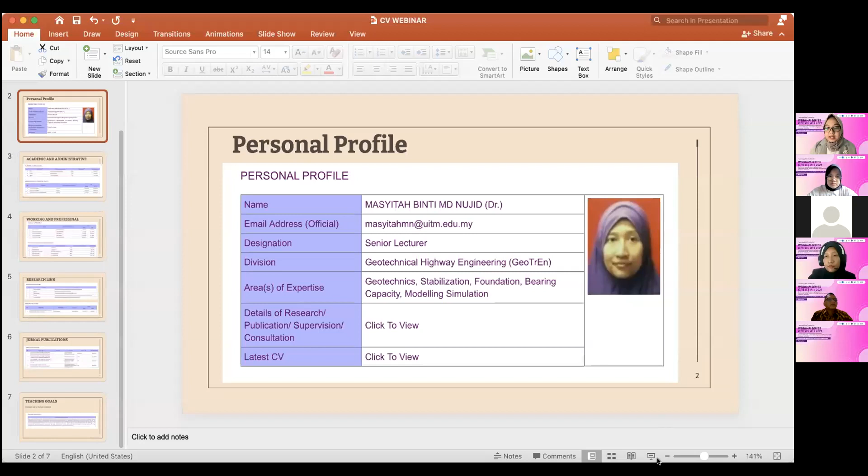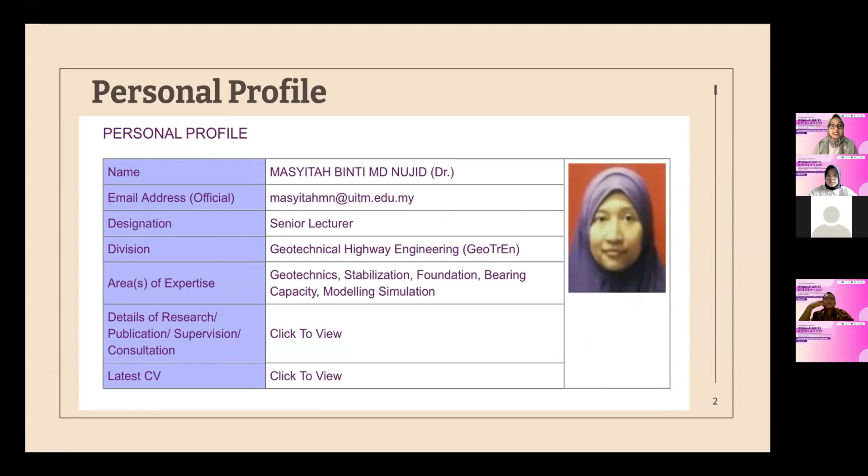Okay, I'll give a short resume about our presenter today. Our presenter is Dr. Masyitah Md Nujid. She is a senior lecturer in the School of Civil Engineering from Universiti Teknologi Mara, or UiTM, Cawangan Pulau Pinang. She graduated with a Bachelor of Civil Engineering from Universiti Teknologi Malaysia in 2005, and obtained a Master's degree in Geotechnical Engineering from Universiti Teknologi Malaysia in 2007.

She now teaches soil mechanics and geotechnical engineering courses, as well as conducts research in the same field. She has published about 24 research articles in the area, in peer-reviewed journals. Her research interests include soil mechanics, computer modeling and simulation, constitutive soil models, and soil stabilization.

You can see in my presentation about her interests in geotechnical engineering. Due to her expertise and experience, she has been appointed as an external examiner, a competition judge, a reviewer for journals and conference proceedings, and a member of an international conference committee from a local organization. Now, please welcome our speaker today, Dr. Masyitah Md Nujid. The time is yours, Doctor.

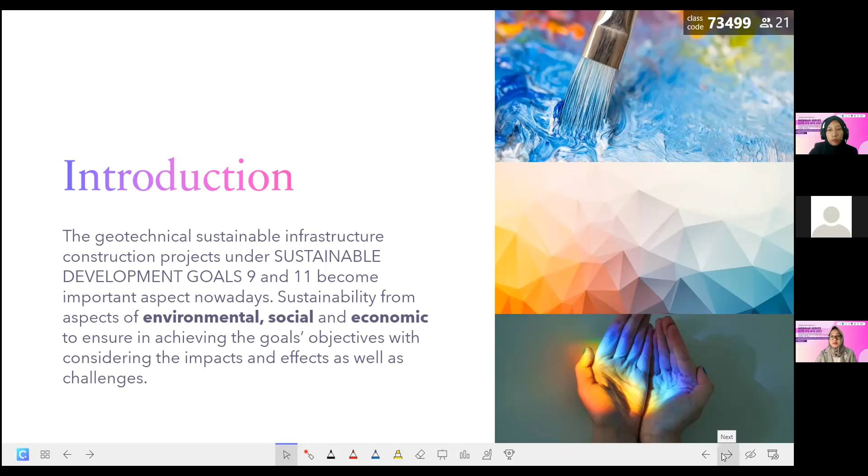So this is the goals that we aim from these activities. Okay, now I go to topic 1. This is about overview of geotechnical engineering.

Dalam geotechnical engineering, kita tak boleh avoid yang ia melibatkan beberapa branches dalam civil engineering itu sendiri. Contohnya bila kita nak buat satu dam, empangan air, kita tengok characteristic properties untuk building tu adalah concrete, kemudian water, and then don't forget about the geotechnical aspect, because this is the foundation base. Kalau you construct any structure without a strong base, struktur tu akan mengalami collapse, akan mengalami failure.

Current practice sekarang, sebab kita dah limited open area, tanah terhad. Jadi option yang kita ada, contohnya kita buat tunneling. Tunneling adalah kaedah di mana kita tak perlu cut slope, tak perlu tukar natural slope jadi cut slope. Jadi kat situ kita dah sustain environmental impact kerana kita guna alternative.

We have to think out apa lagi option yang ada. Contohnya sekarang transportation boleh berada atas jalan, boleh guna light mass rapid transit, contohnya kita ada LRT, kita ada MRT. So these are the options di mana transportation ni ada kaitan juga dengan geotechnical engineering, kerana geotechnical engineering ni kalau nak faham asasnya adalah foundation kepada mana-mana struktur, mana-mana application dalam civil engineering yang you akan bina atau guna.

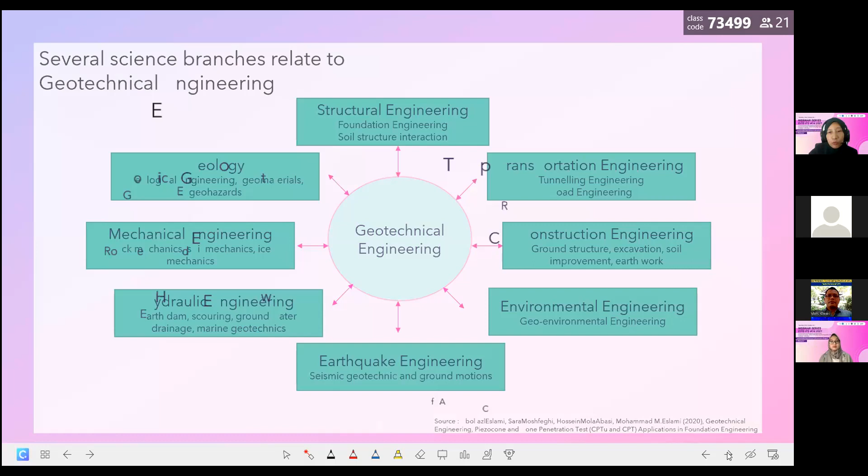So these are the things that we have to look at closely bila you memilih satu area yang you minat untuk belajar dalam geotechnical engineering for example.

Okay, apa peranan anda sebagai geotechnical engineer? Ini yang kita nak tengok. Tadi kita dah tengok branches dia. Antara peranan dia, sebelum kita nak pergi ke peranan, kita kena tengok apa dia punya applications, cabang-cabang yang kita boleh work in that.

Contohnya, as I said earlier, kita ada natural slope, kita ada terrain slope, tapi bila ada water effect, dia menyebabkan instability. So, as a geotechnical engineer, what are the things that you need to think out, or whatever design that you need to propose to ensure the stability of the natural slope, for example, ataupun cut slope. Kalau daripada natural slope tu, you turn to cut slope, what will be the best angle for the cut slope to sustain daripada failure?

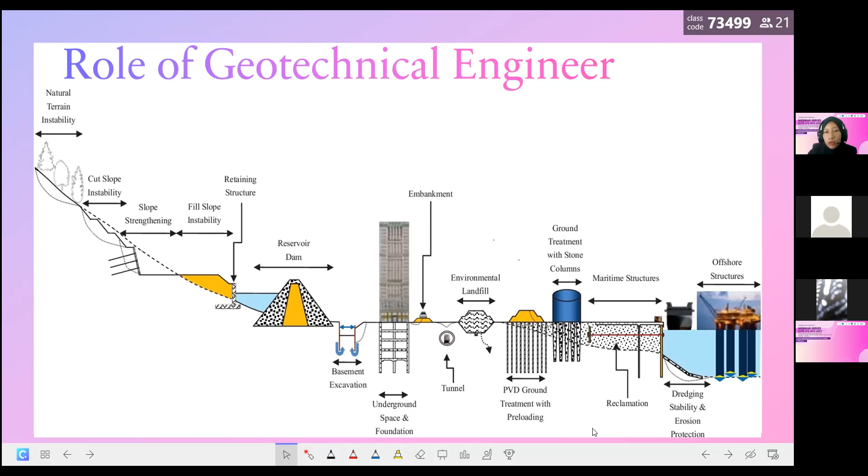Okay, on the role of the geotechnical engineer, as you can see here, there are four important roles. The first is analyze and design. As I said, as a geotechnical engineer, we are not dealing only with construction. Okay, I think I need to stop for a while.

Okay, sorry again, back to our discussion. As a geotechnical engineer, you need to know how to analyze and how to design. Let's say you are choosing a design from foundations—you have a problem site and want to decide whether to use deep foundations or shallow foundations. So as an engineer, first you need to know the soil properties, then use the soil properties at the design stage. Do the analysis, look between shallow and deep foundations, which design gives you the best solution suited to your problem site area.

Somehow, when we look closely at all aspects—sustainability, economy, and project duration—we couldn't simply choose any option due to these reasons. As I said, if we have budget constraints and want to do deep piling, but when we check the cost of a single pile, for example if we choose steel pile and a cheaper pile, it might save project cost. But when it involves a problematic area with high water content, whether you like it or not, you have to use piles.

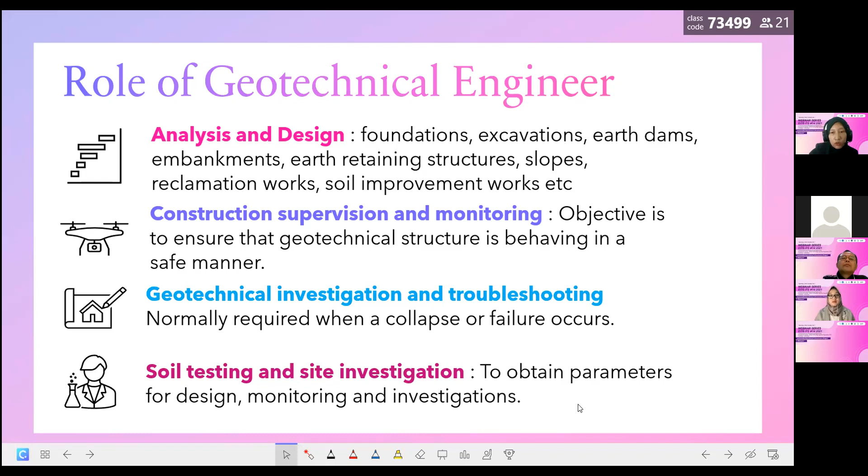So soil testing and site investigation ni is important to obtain parameters for design, monitoring and also investigations.

Okay, these are the applications in geotechnical engineering. For example, you are dealing with a deep foundation, somehow it's a mat foundation, raft foundations, and this cannot be avoided having the deep excavation and underground. So look at the retaining wall itself. They're not using the simplest retaining wall.

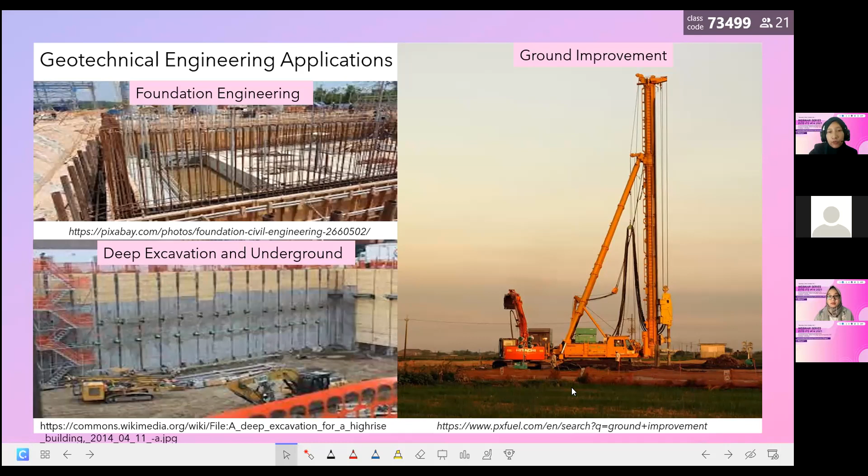Just mention the major group only.

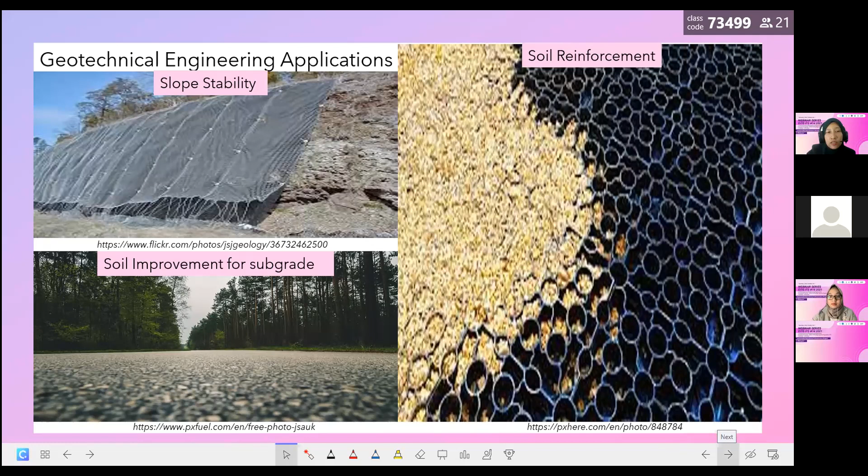Okay, the next one on the part of applications between soil improvement and reinforcement, I try to make a difference from the meaning itself. For example, soil improvement is an alternative considered when the natural soil does not meet the engineering requirements for a project. This is when we need to do improvement.

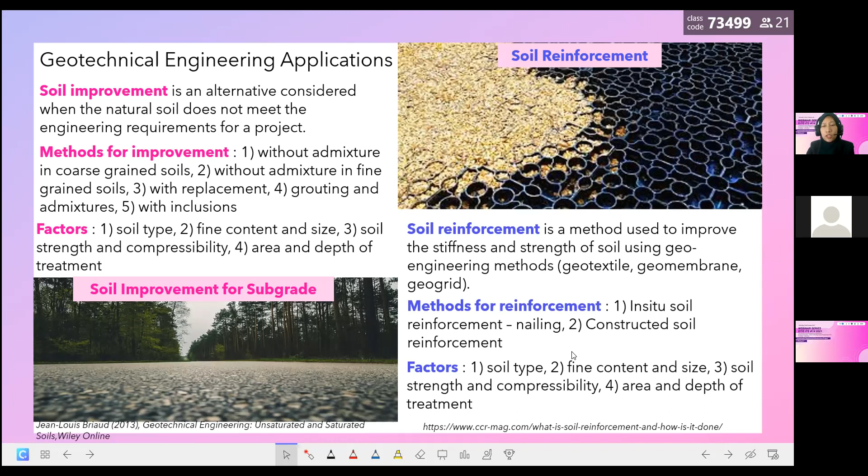Okay, and then the next one is part of the technique. In this technique we have drainage method, vibration methods, grouting and injection, chemical stabilization, soil reinforcement, and ground improvement. We also have heating, preloading soil, vacuum consolidation, ground freezing technique, soil nailing technique, and etc.

For chemical stabilization, due to our concern to avoid or prevent air pollution or environmental effects, you can see the research trend is using natural waste as a stabilization admixture or stabilization material. So now we try to avoid using lime, because when you look closely, lime can produce high carbon dioxide emissions, which is not good for our environment.

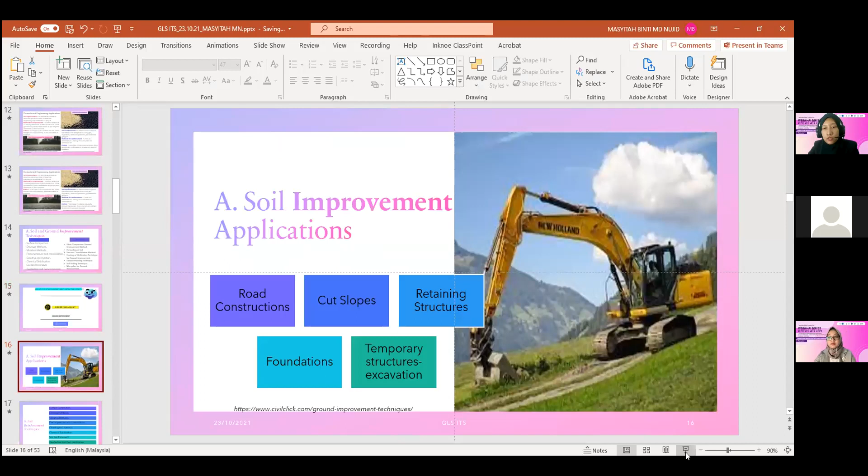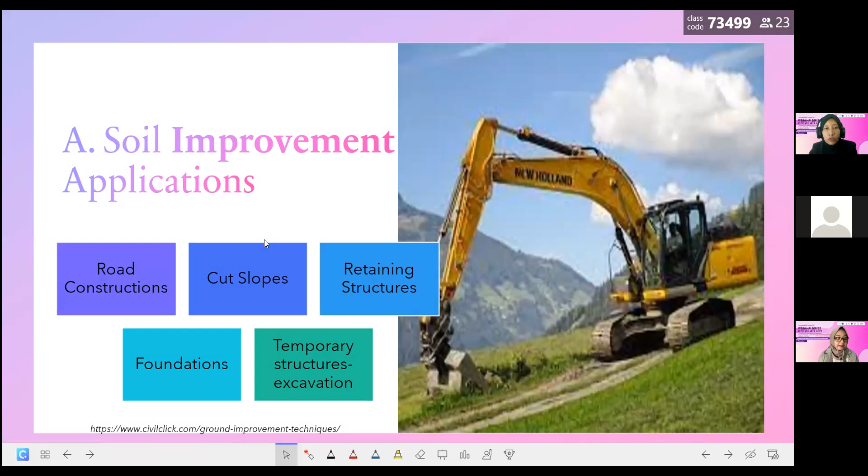Sorry, okay, the next one will be, hold on a second, the next one will be on this part, the applications. So as I said again, when you go to improvement application or reinforcement, it can be in the branches of geotechnical engineering, for example road construction, cut slope, retaining structures, foundations, temporary structure, and excavations.

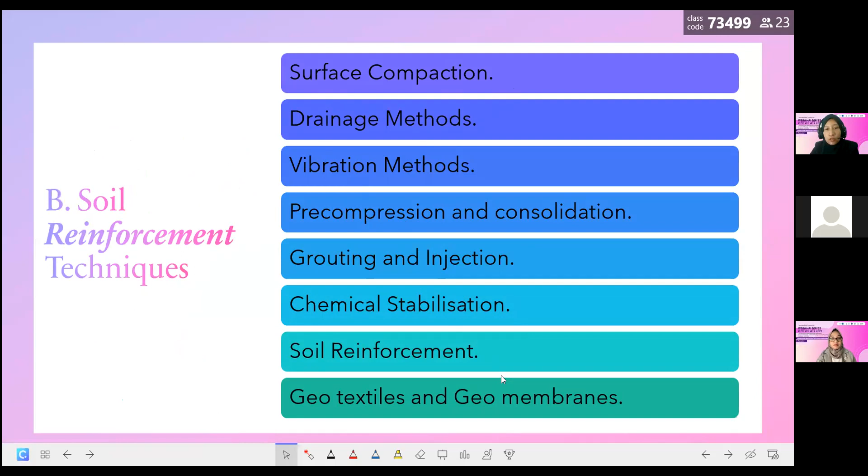The same thing is for reinforcement techniques, in the earlier slide we had a few methods such as surface compaction, drainage method, vibration method, precompression and consolidation, grouting and injection, chemical stabilization, soil reinforcement, geotextile, and geomembranes.

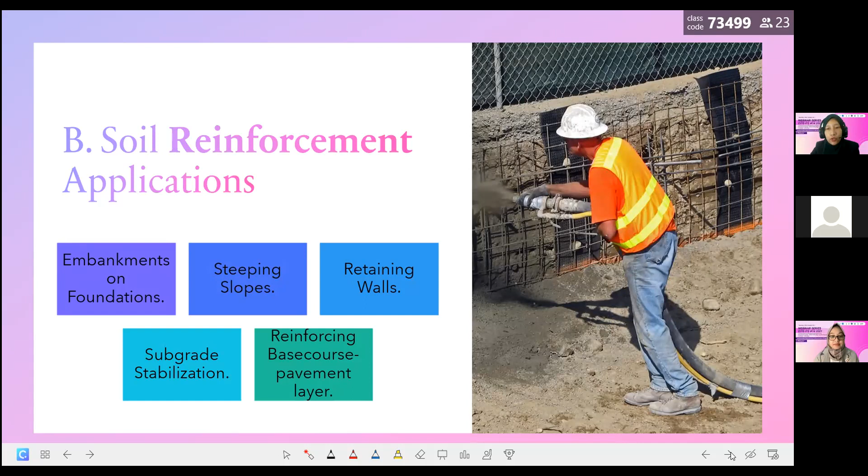Okay, again the same applications as before, improvement, but there are some soil profile conditions where we need to use two methods, both improvement and reinforcement. For example, if it involves very high water content or problematic soil. Other than that, deep excavation and underground works are common practice in Malaysia.

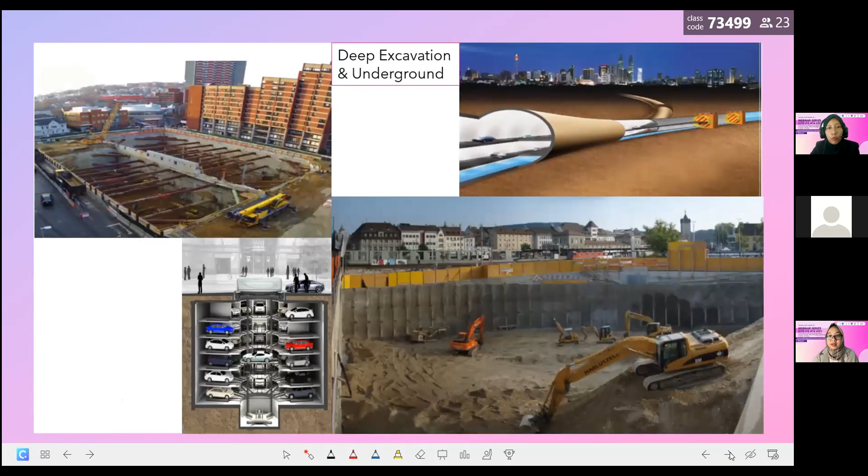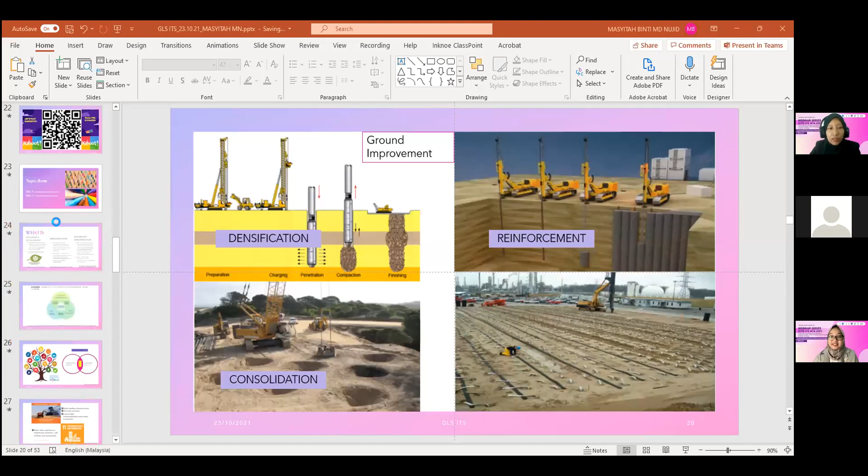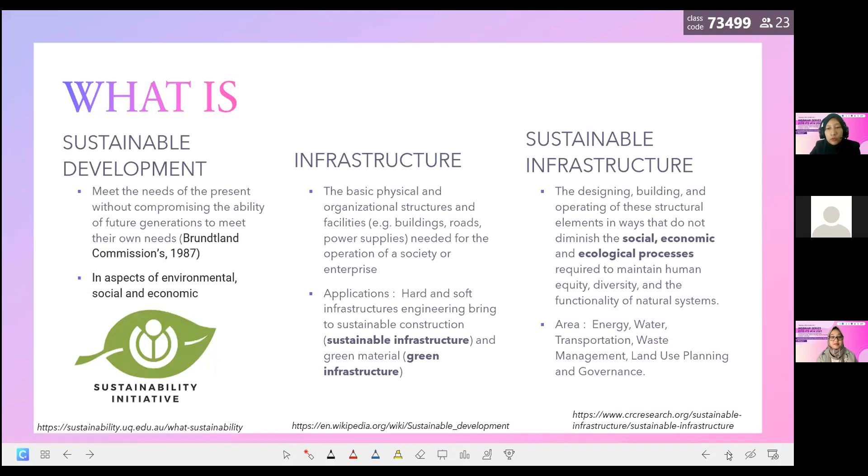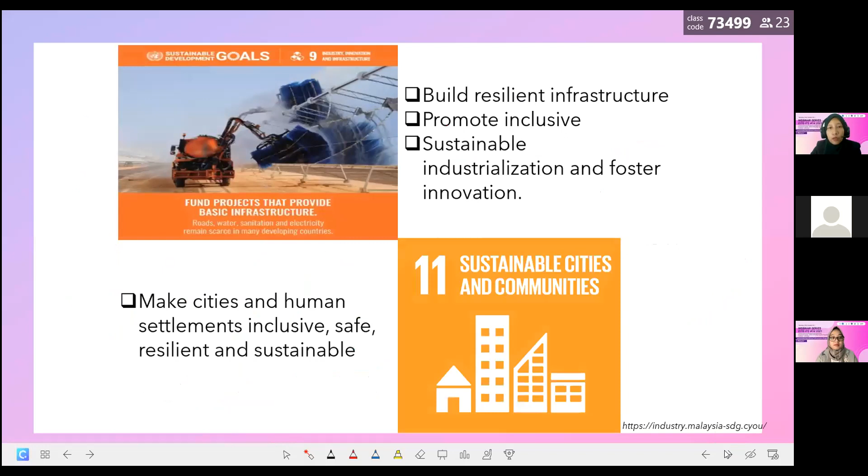Okay, the thing is that when you come out with case studies in Malaysia, they try to produce applications projects that really reduce carbon dioxide, and also in comparison when you look at SDG 9 and SDG 11, they are interrelated. It's the same as what I explained earlier, we look at three aspects from environment, economical, and also social impacts.

So the main focus of the talk here is on infrastructure projects, as I said it involves design, operation, construction, and also practice. The purpose of making this sustainable, from sustainable infrastructure or green infrastructure, is that we want to try to minimize all the impacts from social, environment, and also economic aspects.

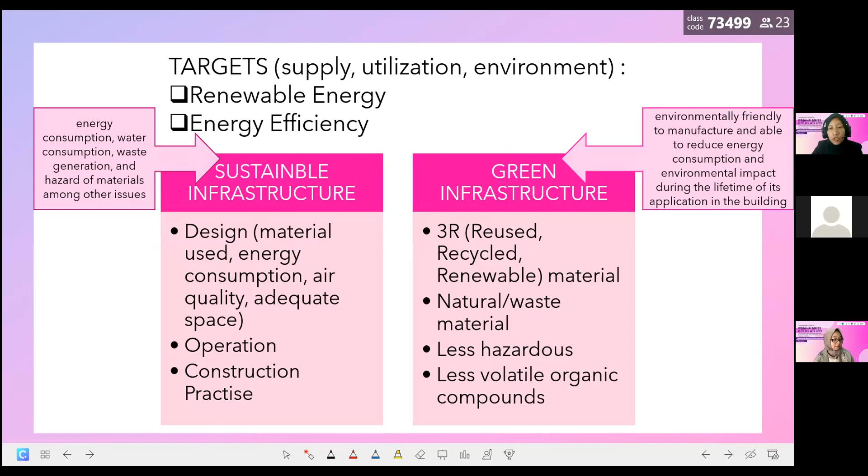Contohnya kalau green infrastructure tu we can use waste material and then kita kena fikir on part of the less hazardous, less volatile organic compounds. But the most important when dealing with these kinds of projects, we have to look at the factors. Apa faktor-faktor yang kita perlu lihat untuk pastikan construction kita tu sustainable? For example, alignment, material and resource, stormwater management, energy, environment control, construction activities. Lastly is the innovation design.

So the next slide, you can see how all these cases that I show you, macam mana they make decisions in order to sustain from any environmental, social or economic aspect impact. Dia melihat kepada teknik dan juga options.

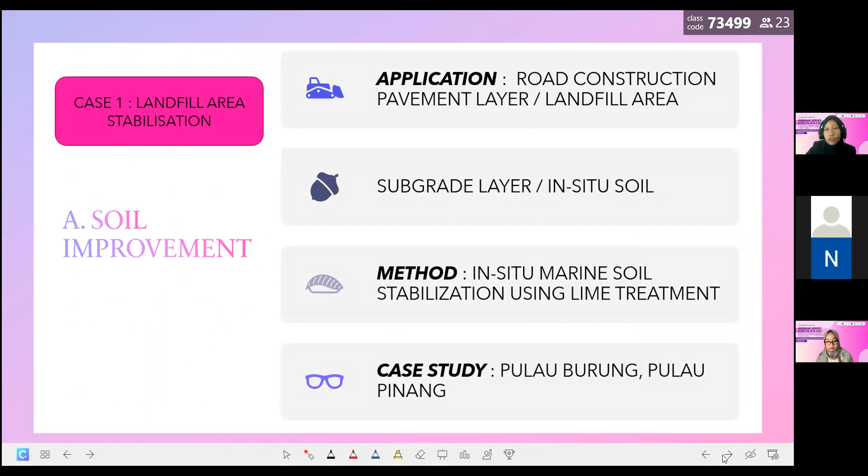Ada satu case yang mana saya tunjukkan di sini macam mana dia berurusan dengan landfill area yang very problematic, high water content. Daripada soil type tu kita dah nampak dia punya color tu grey dan high water content. Then you go to the soil properties, silty clay around 86% and sand only 14%.

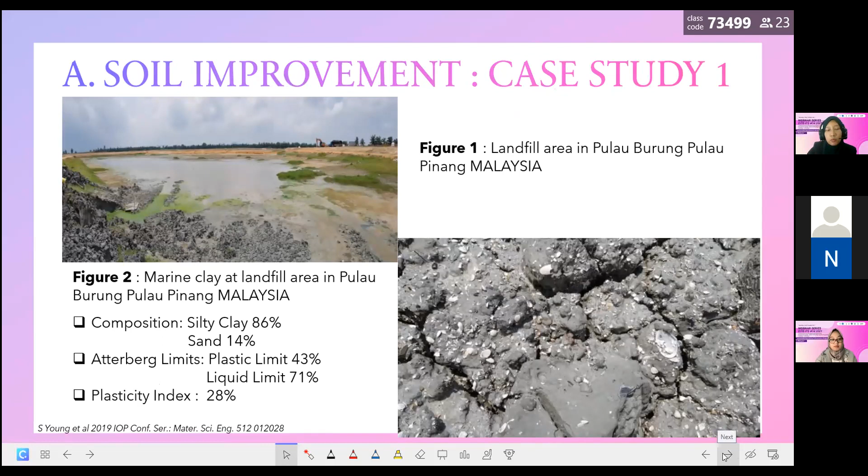So which is the best method technique yang saya bagi tahu awal-awal tadi sesuai untuk improvement. Dalam part ni sebelum dia nak pilih teknik mana yang sesuai, they go to the design and options dia. Dalam kes ni dia ada three options.

Option pertama dia akan construct dengan stabilize 300 mm untuk achieve CBR 30, ataupun option kedua dia buat remove and replace 300 mm, ataupun option ketiga dia remove and replace 1 m CBR5 material.

So in order to choose the best method for improvement or reinforcement, you look at design aspect, operations dan juga construction. In this first case, saya menunjukkan macam mana daripada design aspect ni dia buat satu keputusan untuk sustainkan dia punya project tu.

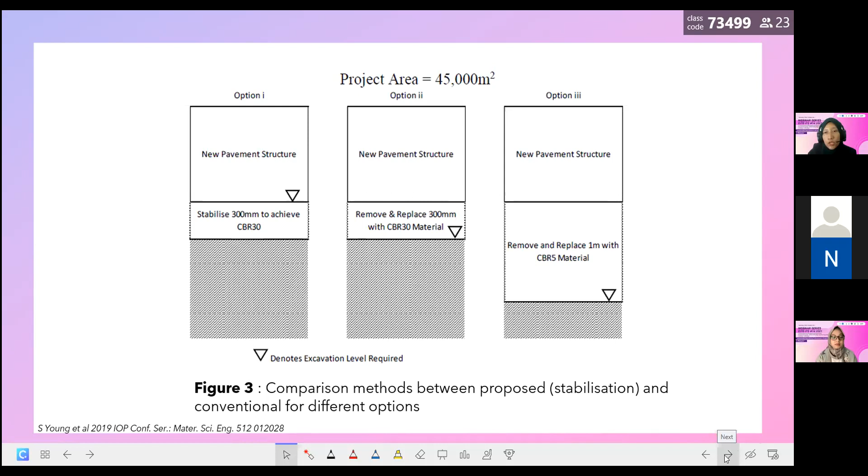So ideally bila dia plot, bila dia keluarkan dia punya data, they can see that the depth of excavation from the top of subgrade kosong untuk option 1. Maknanya kalau pergi option 2, option 3 yang konvensional tu, kita ambil imported fill soil and then kita dump kat site tu, baru kita nak buat dia punya improvement teknik.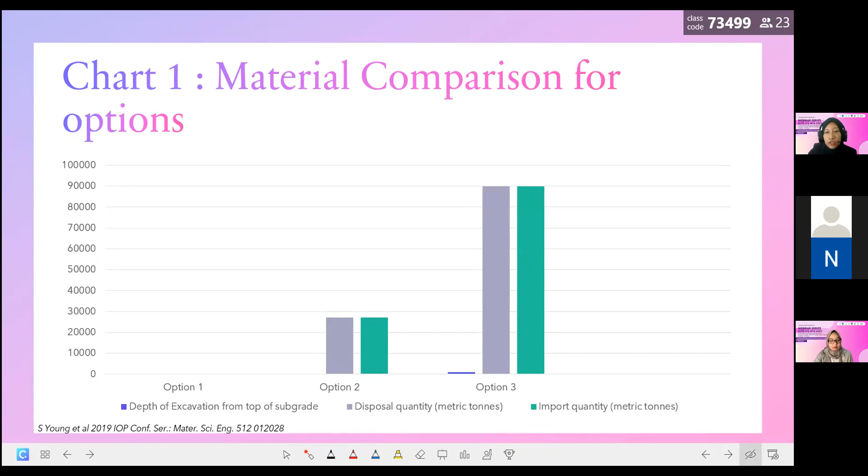Maknanya dia buat stabilization dekat site kat situ. Dekat situlah dia letak lime powder, kat situlah dia improve the soil properties. Dia tak payah ambil borrowing material daripada kawasan lain, dia tambak dekat kawasan landfill area yang saya tunjuk tadi.

So kat situ kita dah nampak macam mana the initial part of the design, kemudian you buat some sort of study sikit, you buat analysis, you buat data comparison, you akan dapat the best result for the methods untuk you guna. Sebab kita nak make our project sustainable.

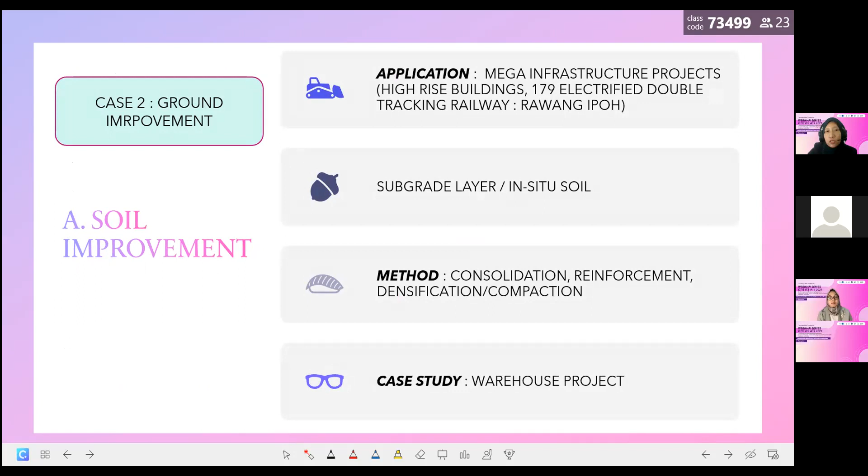Okay, the second case lah untuk saya tunjuk adalah ground improvement. Ground improvement macam saya explain just now, they can be applied on road construction, high-rise building, etc. But this time saya nak tunjuk macam mana ground improvement untuk satu kawasan warehouse area, yang pun as I explain, you dah dengar tadi ground improvement teknik.

So daripada beberapa options, beberapa solutions yang dia dah propose, contoh kat sini dia ada 2 option. First one menggunakan deep foundation dengan 25 cm thick RC slab on piles, ataupun dia menggunakan shallow foundation, loose fill improved by dynamic compaction with 15 cm thick RC slab and 30 cm thick compacted granular layer acting as a load transfer layer.

Okay, macam mana they decide that the best one antara solution 1 ataupun solution 2? Remember, we want to sustain our project. So apa yang they can come out is dia tunjuk comparison

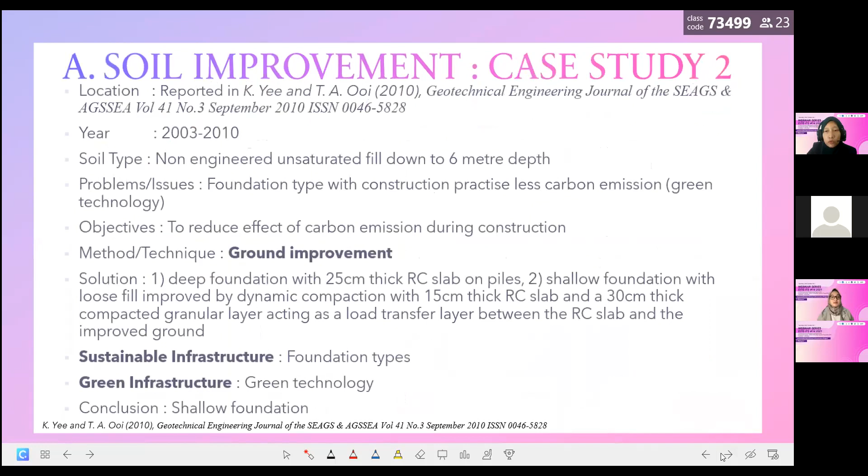tadi antara solution 1 iaitu deep foundation, solution 2 dengan shallow foundation. Dia memberikan satu keadaan yang mana option number 2 in terms of the carbon dioxide emissions CO2 ni lebih kurang kesan dia berbanding dia pakai deep foundation.

Sebab apa? Bila dia pakai deep foundations untuk karakteristik yang dia dah set untuk dia punya design sama ada deep foundation ataupun shallow foundation, dia nampak piling ni consume more energy, 0.49 kg, and then concrete is 15 kg per unit, and additional concrete.

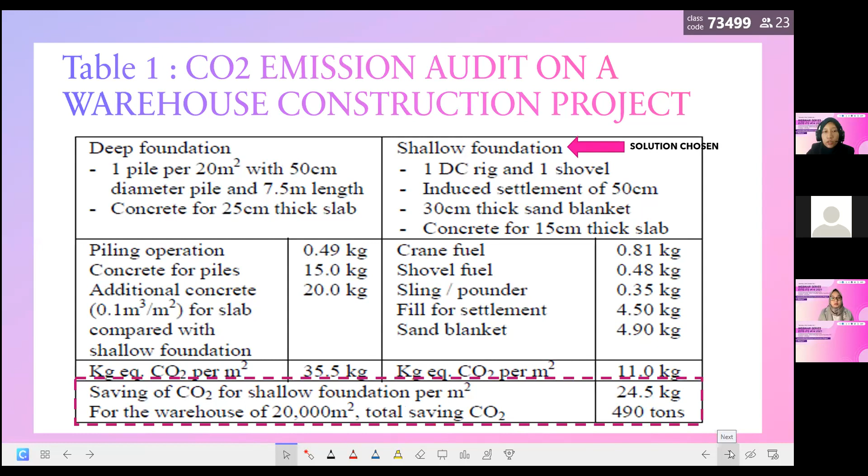So semua ni is not good in terms of the material in order to sustain the impact, atau kita nak kurangkan kesan-kesan lain. So in order to choose which one is more sustainable, the best option is the shallow foundations, sebab bila dia buat pembandingan, dia punya CO2 lebih rendah berbanding bila dia pakai deep foundation solution. Yang ni pun you can see lah from here.

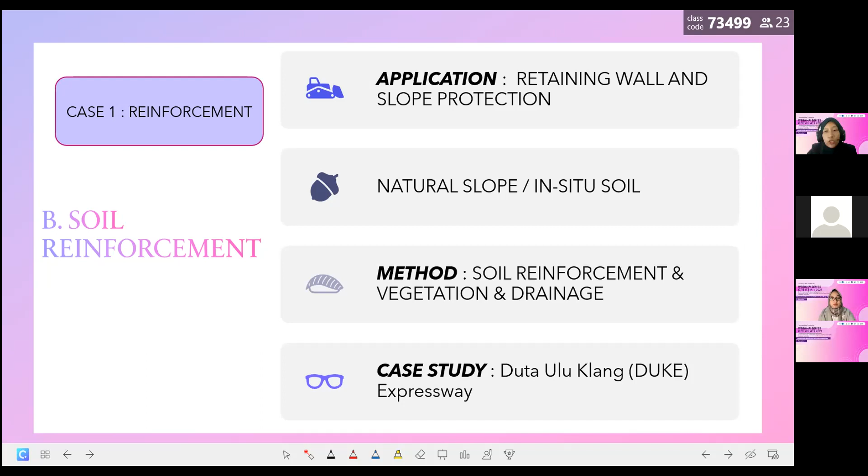So solution 2, shallow foundation is more suitable for warehouse project. And the next one for soil improvement is reinforcement. Reinforcement kat sini saya nak tunjukkan reinforcement can be applied on retaining wall dan juga slope protections. Tapi dalam case ni, salah satu projek dia yang ada di Malaysia adalah Duta Ulu Klang atau kita panggil DUKE Expressway. DUKE Expressway ni is something that kita kena fikir in terms of the material yang mana dia lebih menjimatkan energi.

The purpose we are doing the expressway is because we want to shorten our distance, save time, etc. So bila kita dah jimatkan masa perjalanan, kita dah jimatkan minyak, indirect meaning that kita dah mengurangkan penggunaan minyak kereta, kemudian kita dah mengurangkan kesan carbon dioxide. Remember, bila kereta yang bukan electric car ni, kesan-kesan pencemaran udara tu tinggi kan. So bila kita ada expressway ni, kita dah nampak, of course this will be beneficial. So bila dia buat expressway ni, kita kena pilih lah the best material yang mana boleh menjimatkan in terms of the cost dan juga menjimatkan masa dan semua aspek.

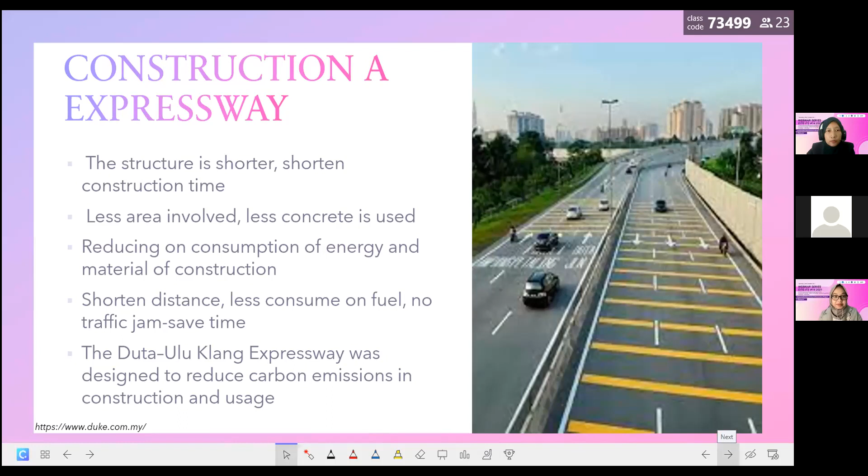Okay, challenges. In this part, I try to summarize all aspects in the constructions, for example money, material, labor dan juga method of constructions. So method of construction ni you kena tengok dari segi design dia, operations dia, constructions activities dia. All these aspects, bila kita nak tengok, kita mungkin win 3 out of 4 factors. Tapi kalau boleh kita nak try tackle dia punya cabaran tu ke semua, dari segi money pun kita optimum, material pun kita boleh jimatkan, kemudian labor cost pun kita dah reduce, method of construction of course.

If you look at closely current trend in construction and material, contohnya sekarang orang dah banyak guna IBS, Industrialised Building System. Kemudian dalam labor cost pun kita dah reduce, kita dah banyak pakai IoT, kita dah pakai BIM, Building Information Model. Kemudian with the help of cloud database, cloud management, kita dah ada web base, so labor cost ni dah boleh berkurangan.

Maknanya in terms of the aspect of the project lah kan, bila kita melihat keseluruhan cabaran-cabaran ni, kita boleh improve bila all aspect, all the parties, all the relevant authority think together macam mana kita boleh menghasilkan satu activity construction project that fulfill the SDG goals. Itu yang benda yang everyone has to think out, how to do construction at the same time dia memberi you sustainable impact. Sustainable impact ni kalau boleh kita look at from three things: economy, environment, dan juga social.

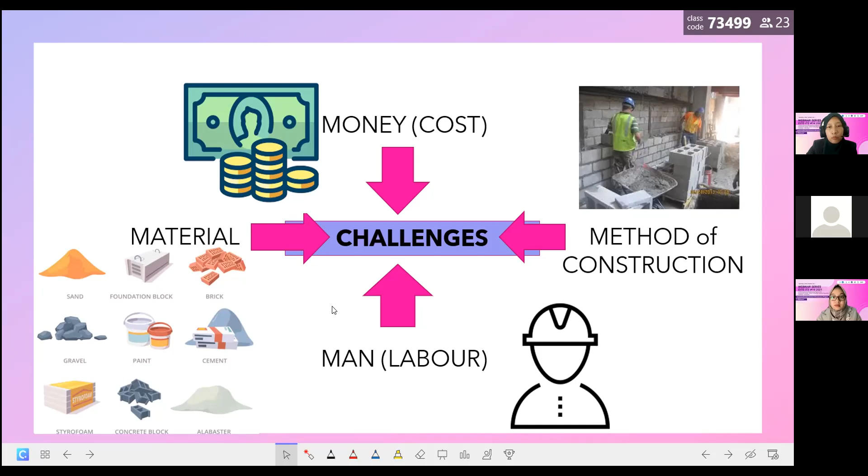So when you do all these things, method of construction, labor, material, money, dia akan jadi satu benda yang kita buat pun kita happy lah kan, dia tak akan buat orang kata apa, regretful lah. The last thing I can say is that the way to get started is to quit talking and begin doing. So let's make our world sustainable in achieving SDG goals. So I only talk about a few SDGs out of 17. I hope that this can be a very, orang kata apa, beneficial webinar untuk every participant to take concern, to take serious on this matter.

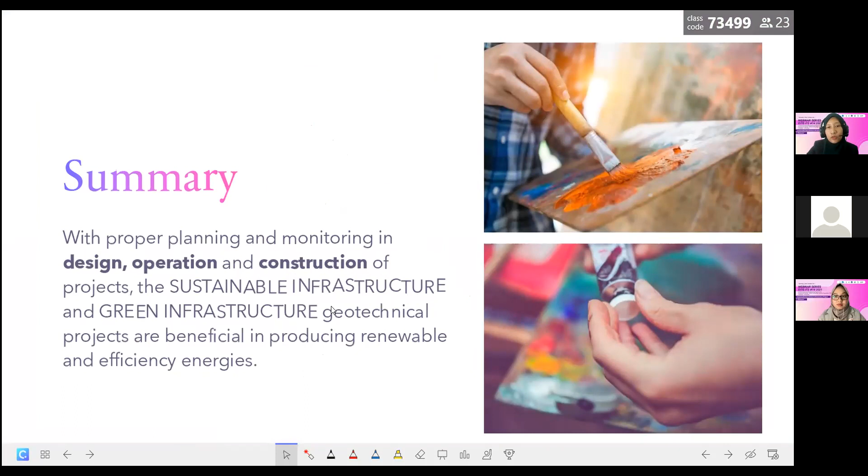Okay, in summary, with the proper planning and monitoring in design, operation and constructions of project, the sustainable infrastructure and green infrastructure geotechnical projects are beneficial in producing renewable and efficiency energies. So that's the end of my presentation this morning.

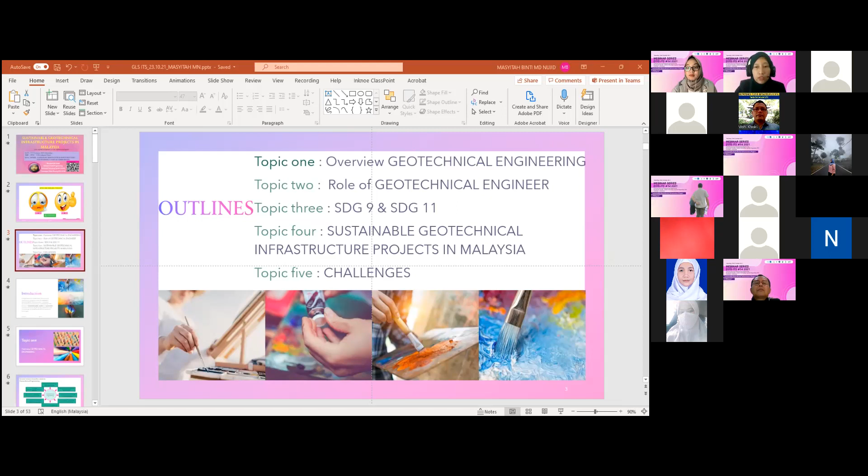Later on, if you're looking for information about postgraduate studies, I encourage you to go to www.uitm.edu.my, under the postgraduate section. So these are the things that we can offer.

Sometimes the supervisor also has a grant, and that grant can be allocated to the supervisee if the student registers under the same supervisor. So it will cover, for example, the study fee, and additional financial aid offered by the postgraduate study office.

Is the information enough, Dr. Mohairi? Muhammad Muntaha, oh sorry, Muhammad Muntaha. Maybe it's okay, thank you, Dr. Masyitah. I think it's enough. Welcome. Thank you. All right, okay.

I'm scrolling through the chat box and I found some questions from the participants. Would you like to answer this question before we end our webinar? This is the last question. Okay, if I can answer it.